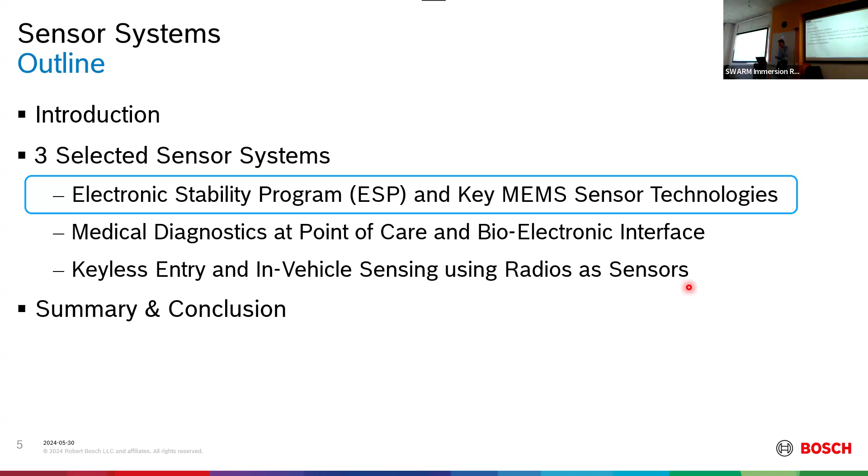Start is a bit slow. We tested audio. Should come in a second.

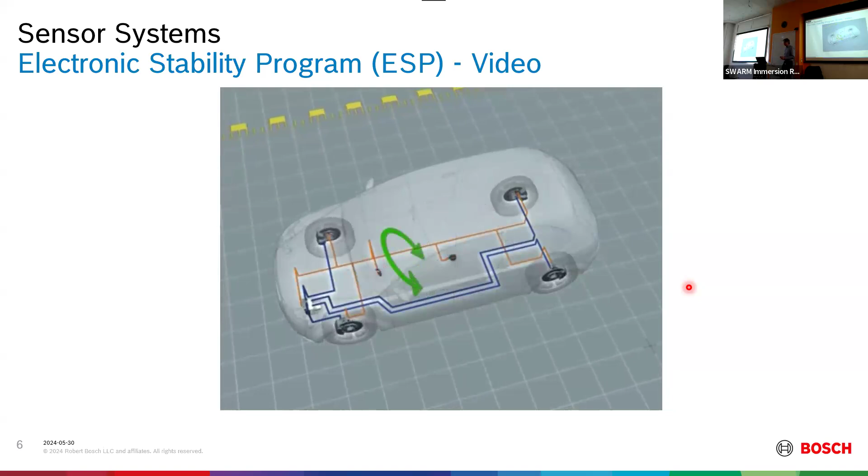In everyday driving, it's normal for transverse forces to arise. But when you drive a bit too fast or turn the steering wheel, these forces can negatively affect road holding. But the Electronic Stability Program ESP nips that in the bud by controlling the brakes, if necessary the engine, and if need be the transmission as well. ESP comprises the following components: a speed sensor on each wheel. The rotation rate sensor measures the car's rotation around its vertical axis. The steering angle sensor registers the driver's steering intention. From the sensor signals, the control unit computes when and how it has to intervene. The hydraulic unit builds up and reduces the braking pressure in the brakes.

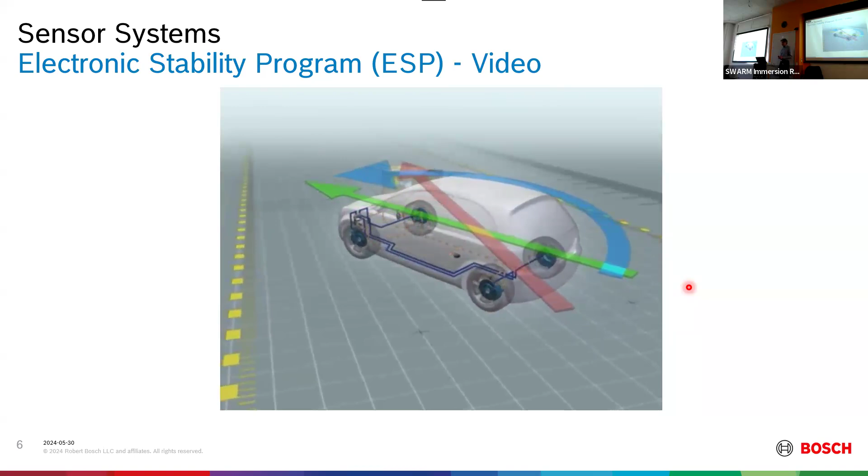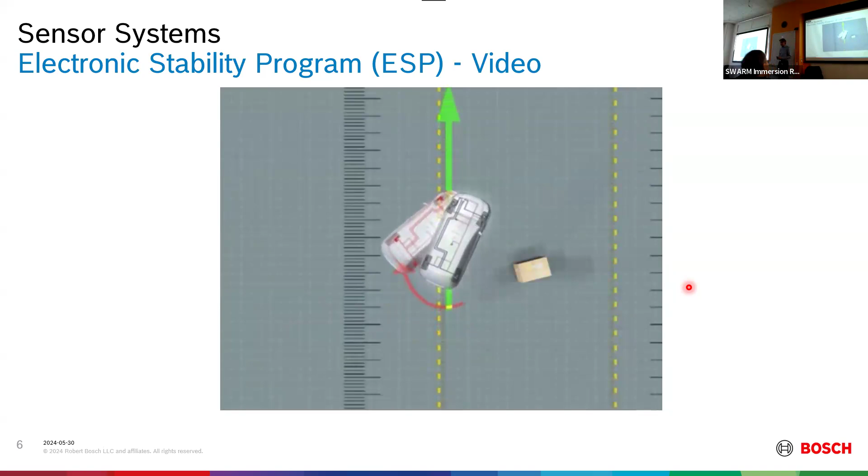What happens during the first steering maneuver? The driver has to swerve quickly to the left. The steering angle sensor transmits this to the ESP control unit. But the rotation rate sensor signals that the car is understeering. That is, it's drifting straight ahead towards the obstacle. In split seconds, ESP brakes the left rear wheel, very briefly and sharply. This produces the desired counteracting force so that the car responds as the driver intended. What happens when you react? When you pull the wheel over to keep the car in the left lane after avoiding the obstacle, the car tends to oversteer, and the rear end tends to break away to the left. The torque to the right is higher than the driver wants. In this case, ESP brakes the left front wheel. The torque is reduced. Instead of going into a skid, the car stays on course, thanks to ESP.

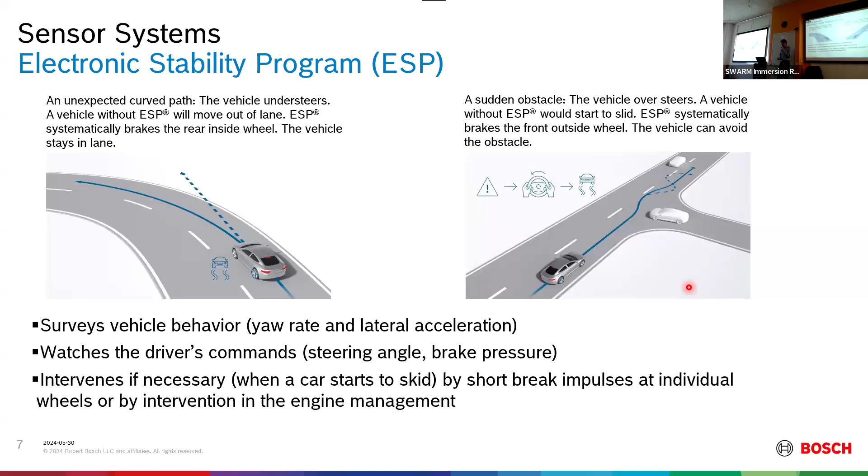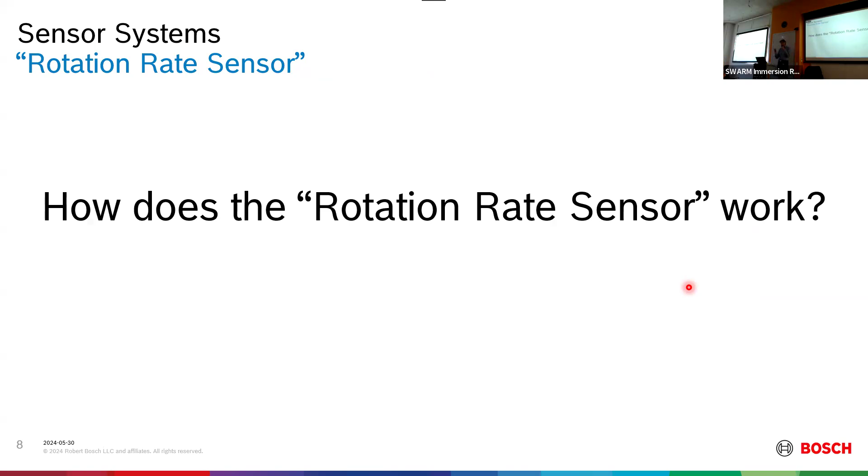So in this video, there was talk about rotation rate sensor. That's a gyroscope or yaw rate sensor. That's the so-called master sensor of the system. So there are different sensors, wheel speed, steering angle, but the sensor that actually finally decides what the system is supposed to think is the yaw rate sensor. So that's the most important one. And I'll show you one example of a sensor, how that looks like, and then go into more detail.

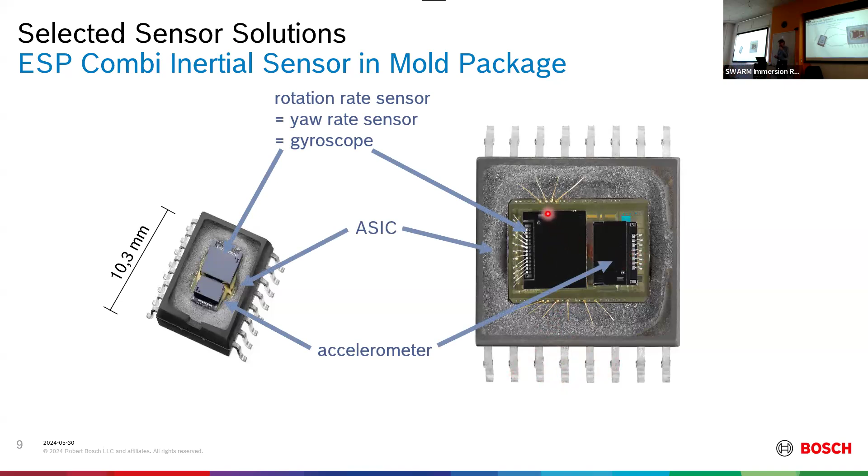So here you see how they are packaged. If you focus on the picture on the right, you see that there's a molded package with lead frame. And then inside of the package, we have the yaw rate sensor, the gyroscope. That's a purely mechanical part made out of silicon. And then we have an accelerometer right next to it, also purely mechanical. And below we have the ASIC. So they are glued on top of the ASIC and then bonded down to the ASIC. And from the ASIC, bond wires are connected to the lead frame.

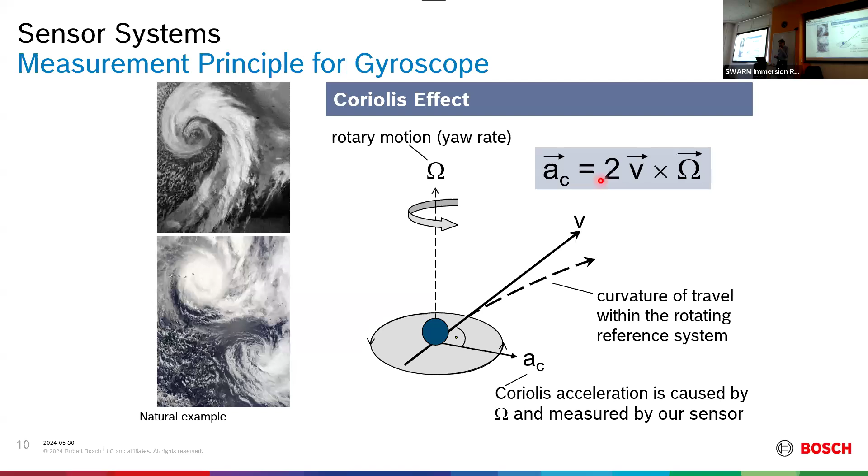So now, if you look at the gyro, it makes use of the Coriolis effect. If we have a mass that's moving at a known velocity v and experiences a yaw rate omega, then it will also experience an acceleration, Coriolis acceleration, which basically deflects the mass to the side. And now if we know the velocity or control it, and measure the acceleration or acceleration force, then we can calculate omega.

And the way we do it is like this. So we do surface micro-machined gyroscopes. It's based on a silicon substrate. Then we do an epi-poly with a thickness of maybe 11 micrometers in this case, goes up to 20 micrometers. And we do wafer level packaging. So we take another wafer that we bond on top of the surface micro-machined wafer. The wafer that we put on top has a cavity etched into it, and then we can encapsulate vacuum in the order of about 3 millibar.

And with this, we get quite a few system aspects. We can generate resonant frequencies in the order of 15 kilohertz, goes up to 30 kilohertz, which makes it pretty robust. We typically employ two masses that we operate in anti-parallel motion, which makes it more robust as well. We have high Q factors in the order of 5,000 in this case that lead to bias stability and good noise performance.

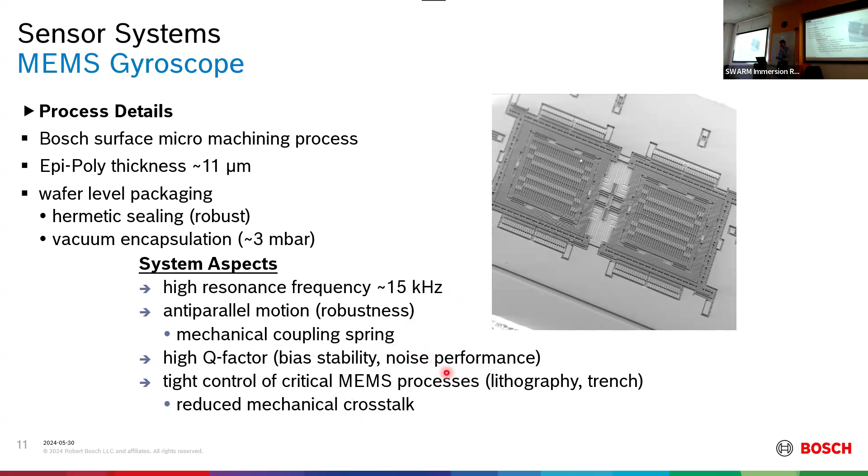And we have a tight control of the critical MEMS process steps. So if we look into more detail how this structure actually works, if we focus on the right side, one mass consists of 3 frames, and they are now illustrated in different colors.

So the red frame here, that's the so-called drive frame. And by applying electrostatic forces between the finger structure of this drive frame and fingers that are stationary on top of the silicon chip, we can actually pull this drive frame down in this picture, like towards the bottom of the slide. And if we apply the voltage on the top, we can pull it up. So we can pull it back and forth by applying electrostatic forces.

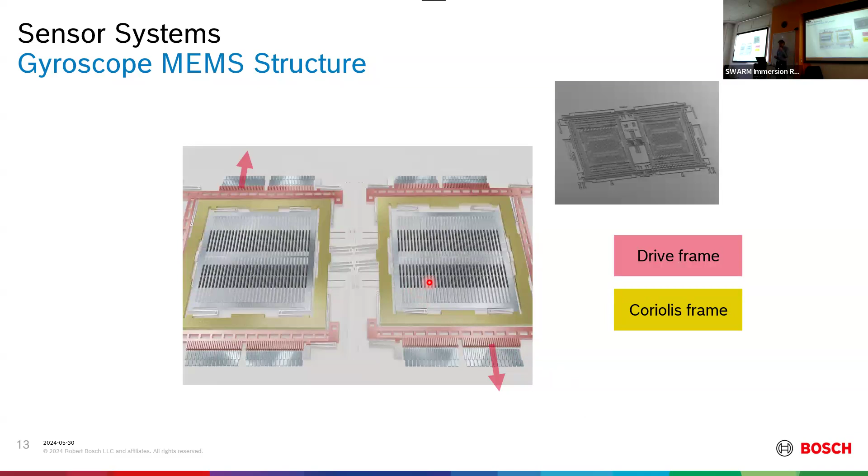And now in the center, here, there's this yellowish frame. That's the Coriolis frame that moves with the drive frame. It's mechanically coupled and moves with the drive frame up and down. And this will experience now the Coriolis force, which will make it also go sideways if there's yaw rate.

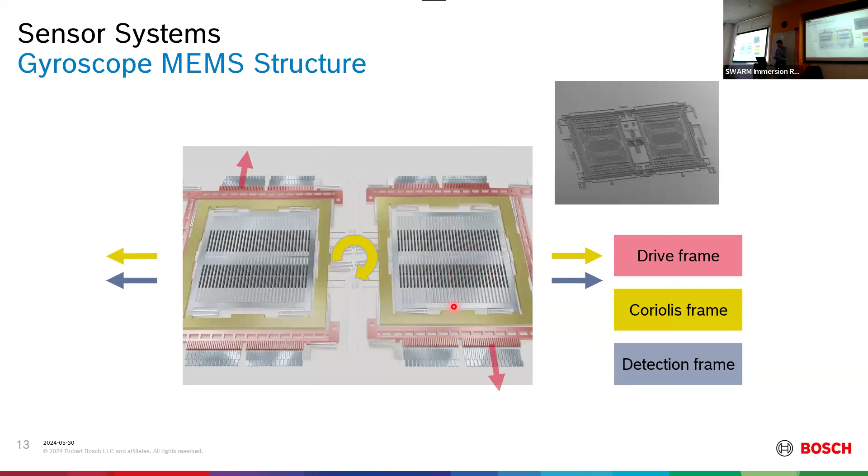And so this yellow frame then is mechanically coupled to the frame, which is gray here in the center. And that's the so-called detection frame, which then moves left and right. And then we can use, again, interdigitized structures here in the center to read out the movement as a capacitive change.

And so the electronics that's wrapped around this looks like this. We have our red drive frame here that needs to be driven back and forth at a resonant frequency of the structure, about 15 kilohertz. And in order to do this, we sample the deflection by having a C to V converter that converts capacitive change into voltage. And then we convert it into the digital domain with an A to D converter. We have an automatic gain control, AGC, that has a target amplitude for this structure. And then we couple back via a D to A converter and apply our electrostatic forces via voltages and drive this red frame up and down.

And on the detection side, we again use a C to V converter that measures the deflection of this gray central frame, converted to voltage, converted to digital domain, then we have digital filtering. And in our case, we actually do force feedback. So we couple the loop and feedback voltages to keep this frame still, and we only measure the force that we need to apply to keep it still.

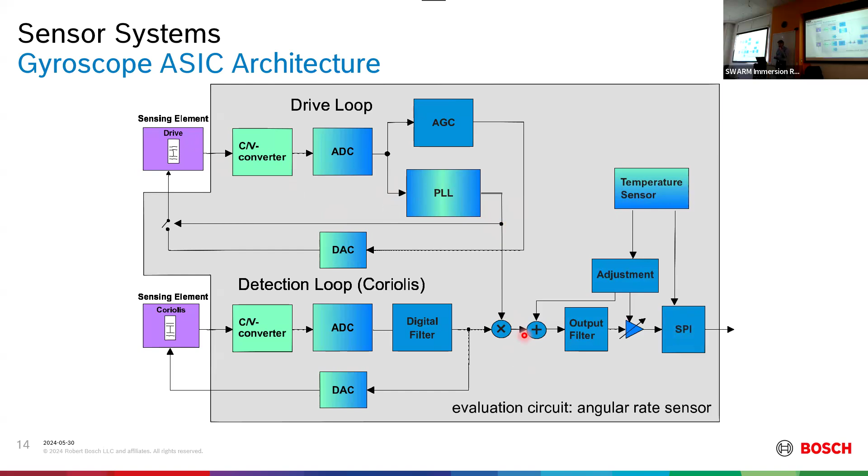And we run a PLL of the drive resonant frequency. So we don't need any external clock. Everything is clocked from the MEMS element and in sync with it. And then we can relatively easily demodulate and then look for the output signal, filter it, correct it for temperature changes, and then apply it on a digital bus. So that's the way the system is set up.

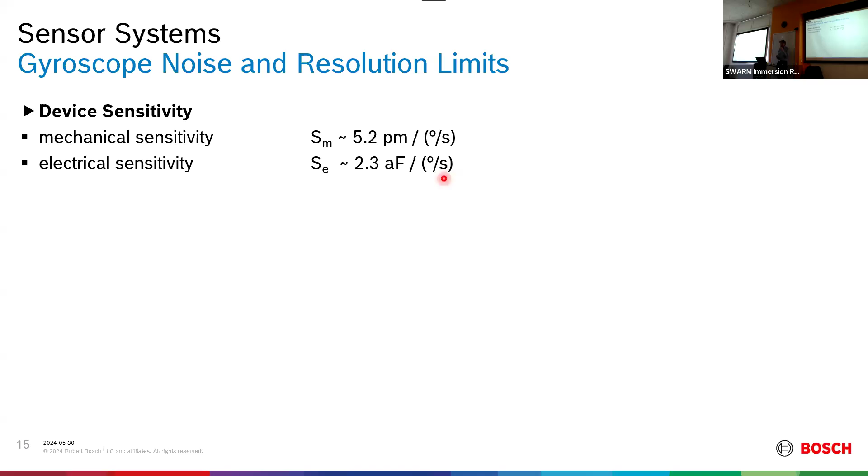I'll show you a few performance characteristics. Electrical sensitivity of such structures is about 2.3 attofarad per degree per second, which is pretty precise and leads to a pretty low resolution limit. Just for the fun of it, we thought, could we measure the rotation of the Earth with such a sensor? And the answer is yes.

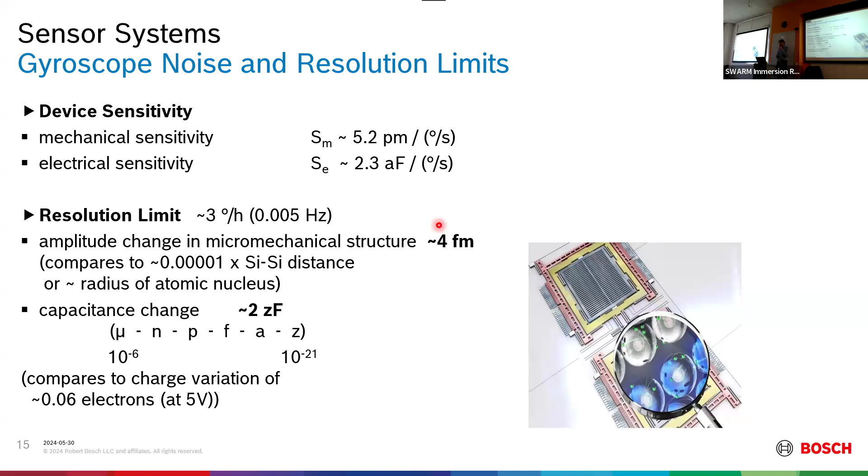So if you put a low-pass filter behind with about 5 millihertz, you can actually measure about 3 degrees per hour, and that's enough to sense the rotation of the Earth. And that actually is equivalent to capacitive changes in the order of 2 zeptofarad. So very precise, and has to work over temperature for automotive range between minus 40 degrees C and about 140 degrees C.

One can ask how many such MEMS sensors are in a modern vehicle. The answer is it's about 50 sensors that we have in modern vehicles. Different categories. There's passive safety, for example, acceleration sensors for airbag systems. There's active safety, there's ESP that we just talked about. Powertrain, for example, mass flow sensors. They measure how much gas is flowing into the engine for engine control. And there are comfort functions, for example, again, inertial sensors for navigation.

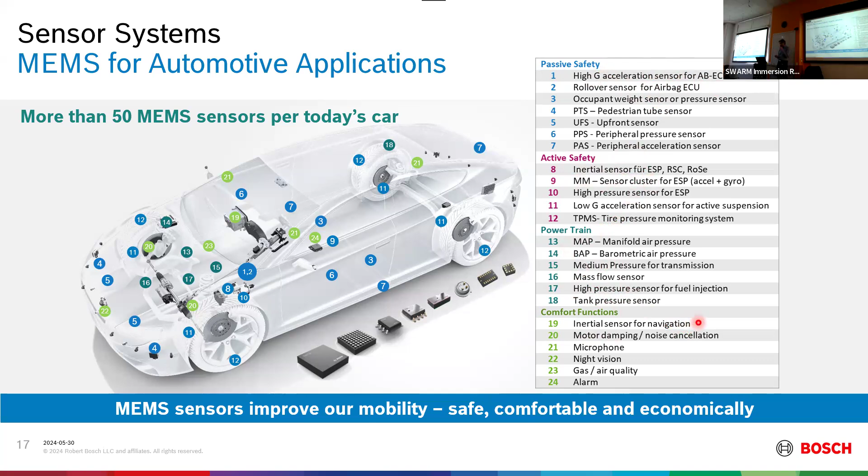There's also consumer sensors, as we all know, smartphones, hearables. There are accelerometers in earbuds, all the way to gaming. There's one area which is, in our opinion, also a good application field for such micromechanical sensors that I haven't talked about, and that's the medical field. So I would like to motivate why it makes sense to have medical diagnostics at point of care, and then also go all the way down to the interface.

So point of care, the pandemic has shown us it's important to do tests right where the patients are. If somebody wants to know if a person has COVID, for example, it's good to have a COVID test right there, and ideally one that's very precise, like a DNA-based test, and not have to send samples to a hospital or like a central lab and wait for 2 days or so to get the results back.

And at Bosch, we introduced a platform into the market for point-of-care medical diagnostics. So point-of-care means hospitals, doctors' offices, schools, could also mean people's homes, actually. And this platform is an open platform. So it's a system where partner companies can actually bring their tests and run it on the Bosch platform in a fully automated way. And it consists of 2 main parts.

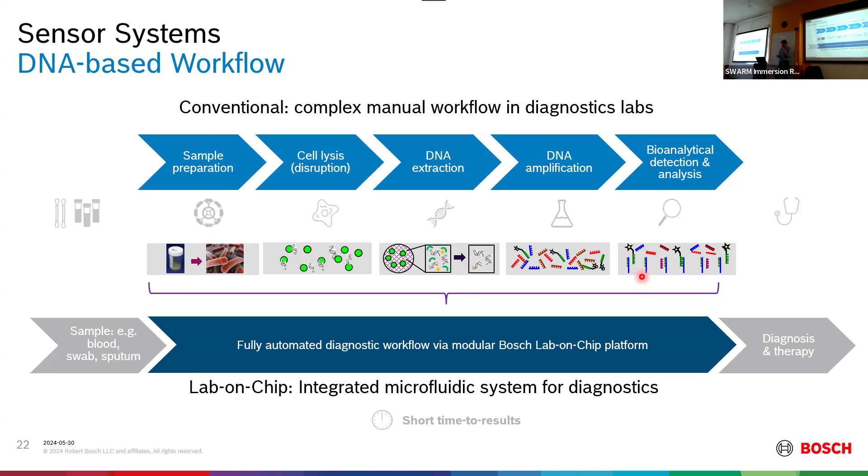So if you look at the range of applications, what I just talked about is the very first kind of application. It's rapid diagnostics, 30 minutes, maybe 1 hour at point of care, using DNA half strands. They're called oligonucleotides. And we typically use about 6 oligonucleotides to determine 1 bacteria, for example. There's another range of applications, which is immunodiagnostics. So that's looking for proteins, not for DNA. And we as Bosch don't have a product in the market yet, but we are doing research in this field. And here it's about detecting proteins. For example, troponin is a marker for heart attack. And that's also very important to know at point of care.

Then we could drive the very first kind of application a bit further and multiplex it, like having several tests run on one cartridge and having many oligonucleotides spread over a sensor area. For example, way more than 100 different kinds. And that would then enable tests like sepsis, for example. And then there's the last application area, which is oncology. Imagine taking a biopsy of a person and then analyzing the tumor cells for its tumor DNA and detecting what kind of tumor it is and if the tumor has mutated.

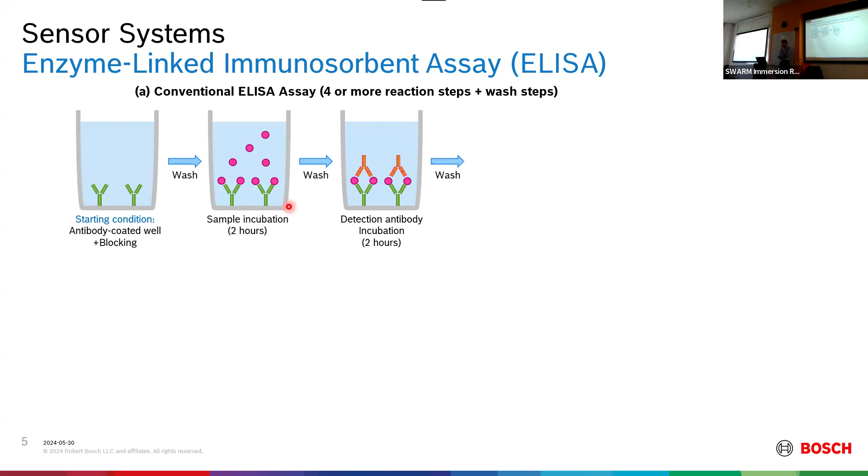Then a detection antibody is added, incubated for about 2 hours. Unbound detection antibodies are washed away. Then an enzyme is added. And then afterwards, a substrate is added for developing this for another 20 minutes. And then if everything works out, and the sample was in the solution, then you have this sandwich here formed, and you can actually see a color change in one of your containers here. So now we believe this can be made much easier.

And we did some research on this. So what we do is, instead of using such a 96 well plate, we use a different substrate that is electrically conductive. And it could be a CMOS chip. We chose to go with a glass slide. So that's a typical glass slide here that you would see if somebody does experiments under a microscope. If you look at it a bit more carefully, you will actually see that we patterned the glass slide. So there's a layer of ITO, indium tin oxide, on top of the glass slide, which is transparent, but also electrically conductive. And I'll show you what we do with this.

So the first step is similar to the standard. We spot capture antibodies with a spotter. Spot size is about 100 micrometers. So we can spot many, like thousands of spots on such a glass slide. And after we have spotted the antibodies, we wash the unbound antibodies away. So we need to do one washing step. And then we add everything else. So we add the sample, detection antibodies that are marked with fluorophores, and let it incubate. And now we don't need to do anything else.

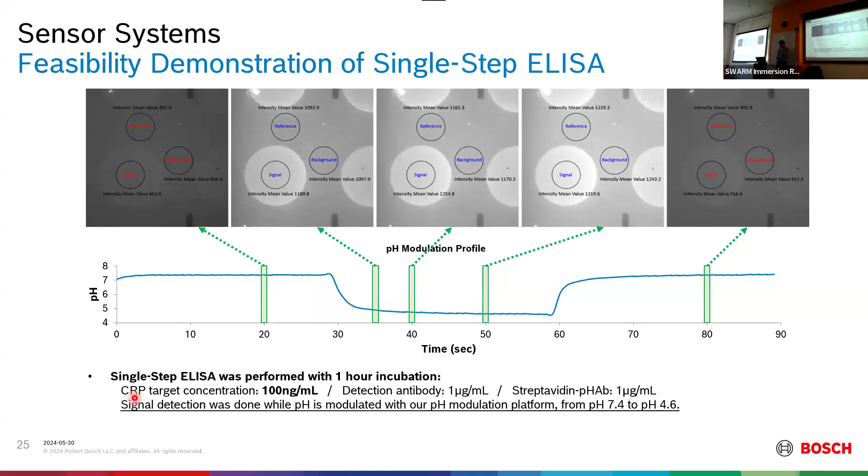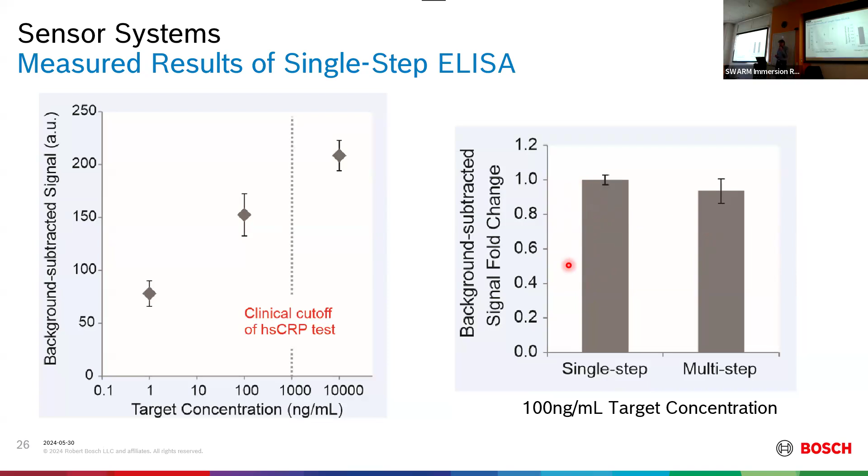To show this in more detail, here on the x-axis you see the concentration, and on the y-axis you see the background subtracted signal, and you see at 100 nanogram per milliliter, there's a distinguished signal. Even for 1 nanogram per milliliter we can still see a signal, and the cutoff in clinical settings is about 1,000 nanogram per milliliter. We compared it to a standard ELISA and see that we pretty much have the same sensitivity. We are slightly more sensitive, but it's pretty much the same. So with this, we believe that you can actually make an automated test that runs in much less time without any human interaction and do protein-based sensing.

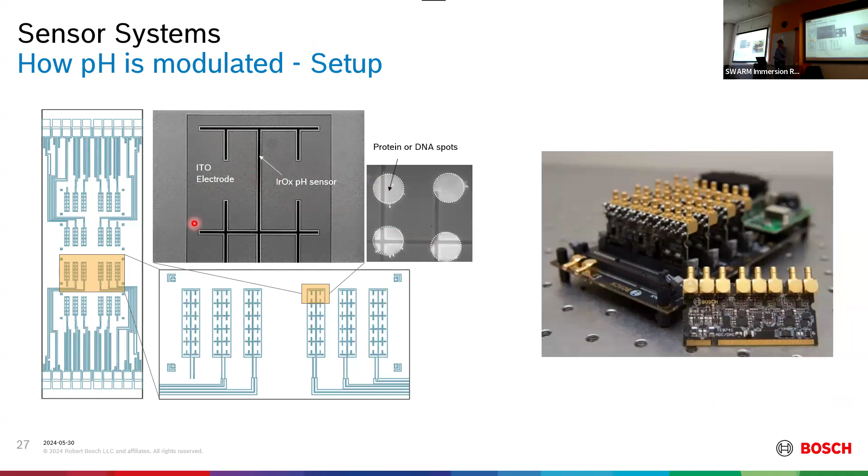Now the question is, how do we modulate pH so close to the surface? And that's what this slide is for, that's currently going around in the room. So that's a slide which is made out of glass, coated with ITO, as I mentioned, also coated with iridium oxide. Here you see a picture. So most of the surface is ITO, and then there's iridium oxide as well. And here you see the spots again, and some electronics that we built in order to control this for prototyping. Here you see how it actually works. So if you look at the glass slide from the side, you see working electrodes in light blue.

They are short-circuited, all connected together. And you see the iridium oxide electrode right between them. And now, on top of this is aqueous solution with all the ingredients that I just mentioned, plus one, which is a quinone. So this quinone here has hydrogen atoms that can be set free and become hydrogen protons, and also electrons can be set free.

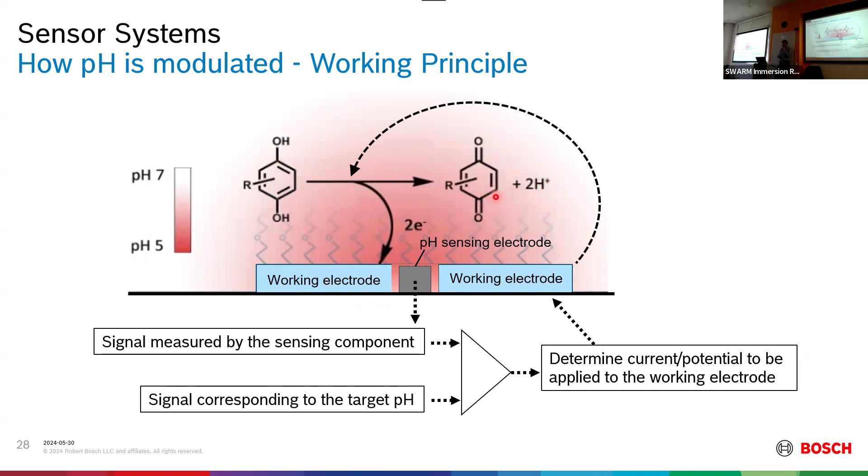So if this is oxidized, 2 electrons will flow to the working electrode, and hydrogen protons will be set free, which changes the pH. pH goes down. So now by sensing the pH with our iridium oxide sensor, and then applying currents via those working electrodes into the solution, we can actually change the pH via software at the end, electronically, in a closed loop manner.

And we believe we can actually do more with this pH modulation. But that's also a question to you. What else could we do with such a modulation technique close to the surface? It might be also a potential for collaboration between us and you if we find a good application to apply this to.

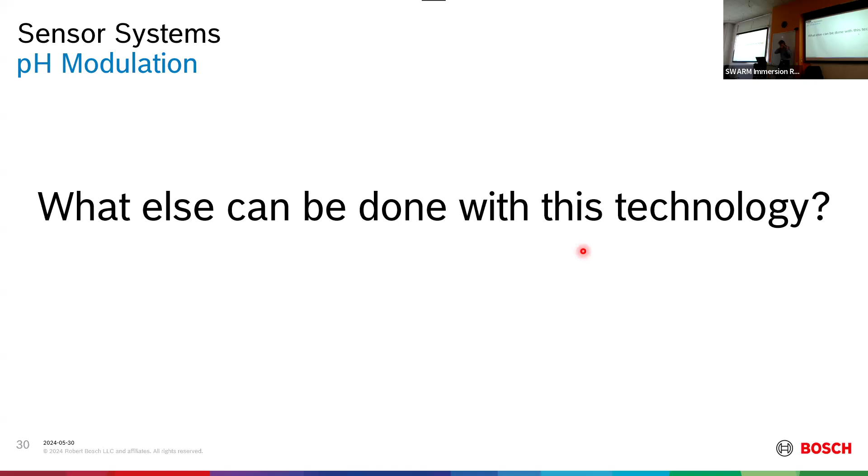With this, I would like to go to the next application area, which is keyless entry and in-vehicle sensing using radios as sensors. So again, I would like to show a brief video, 1.5 minutes or so, to explain the application, and then I would go into the details.

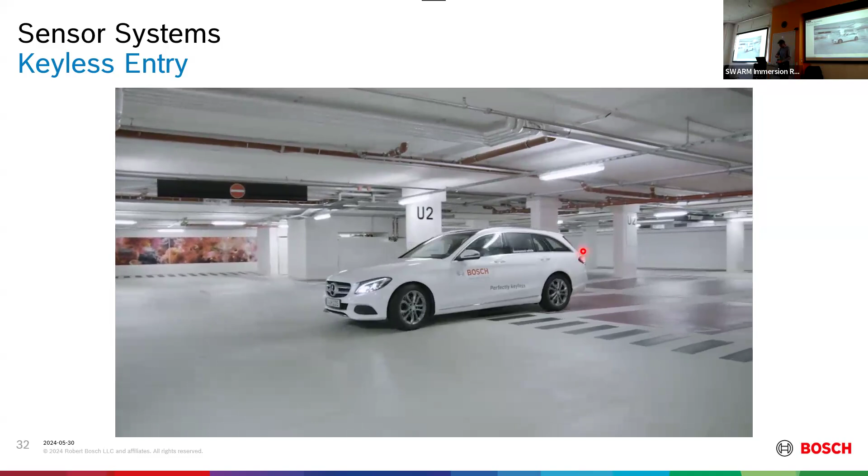With the secure system Perfectly Keyless by Bosch, your smartphone becomes the key. In Perfectly Keyless, vehicle and smartphone perform the locking and unlocking of the vehicle reliably and precisely. When the driver gets out, the vehicle independently searches for the key. If the smartphone is removed from the vehicle in the locking zone, the vehicle is locked automatically. A message on the smartphone screen notifies the driver.

Perfectly Keyless offers more comfort and flexibility to the driver. The vehicle owner can grant other users access to the vehicle using an app. An additional key is then sent over the cloud. Each user receives their own personal key. Thus, the driver can easily allow others to use the vehicle wherever they are.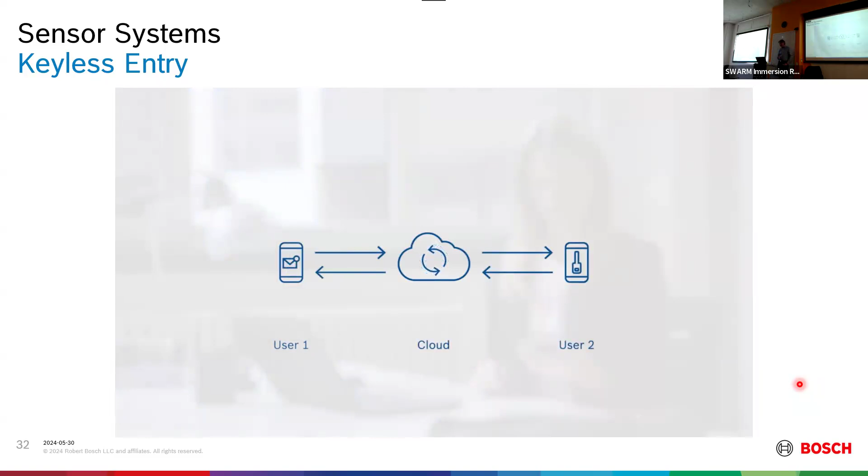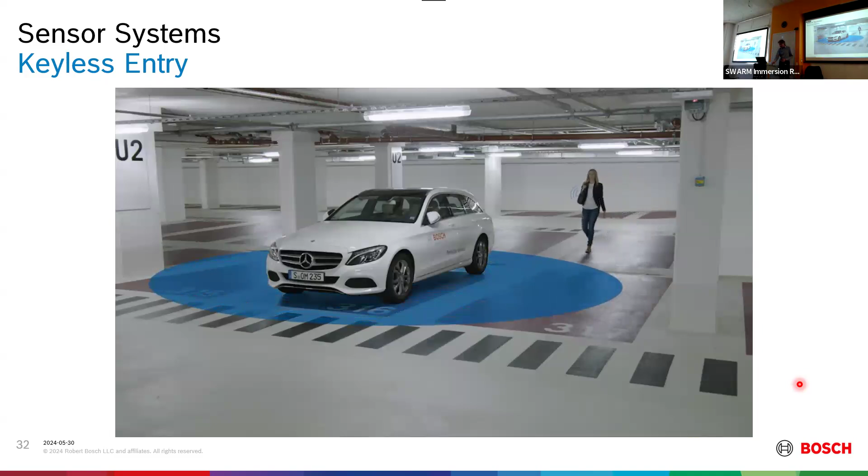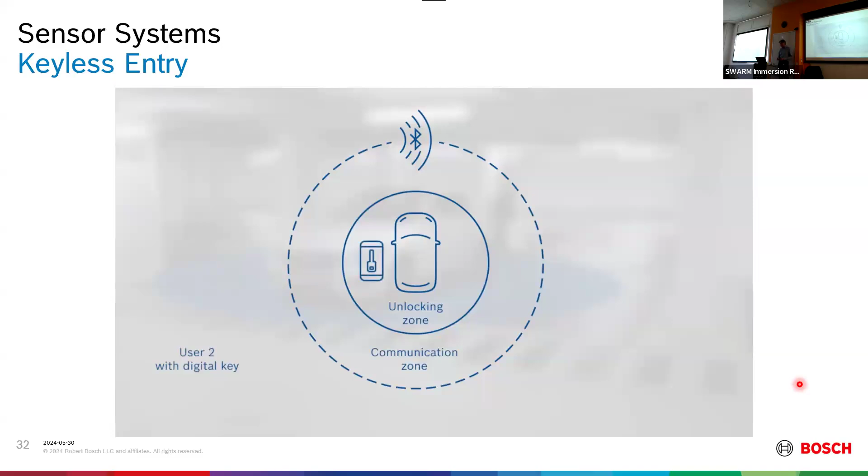The system's automatic opening function is also very precise. The smartphone only links up with the system when it is within the communication range of the vehicle. As the smartphone approaches the vehicle and enters the unlocking zone, the vehicle is unlocked automatically. As soon as the vehicle is automatically unlocked, customized settings such as the mirror and seat positions are also triggered.

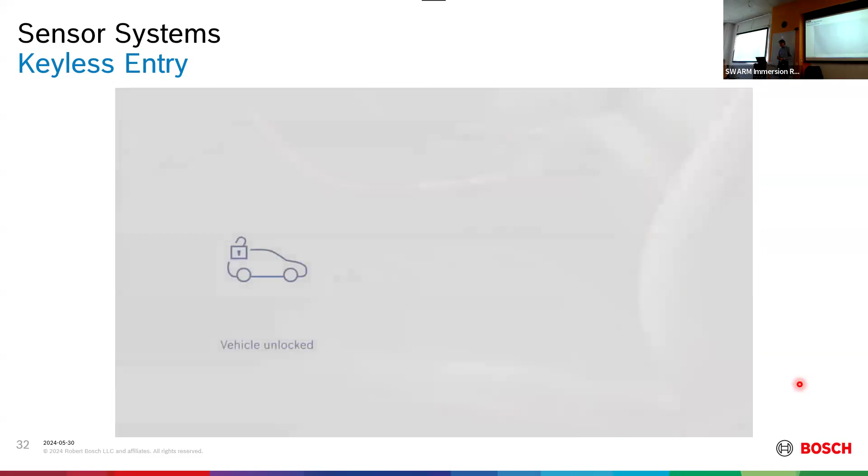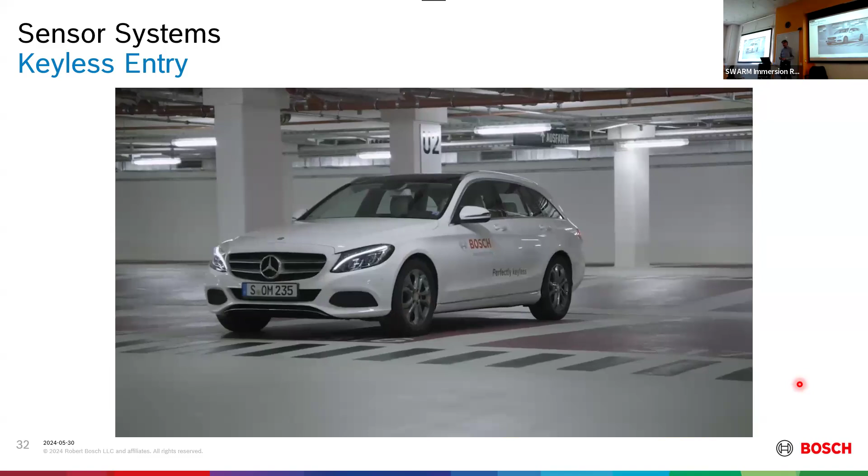The passive start is another function to make your life easier. When the start-stop button is pressed, a search for the digital key is initiated inside the vehicle. If the search is successful, the engine will start. Perfectly Keyless by Bosch. Comfortable, precise, and secure.

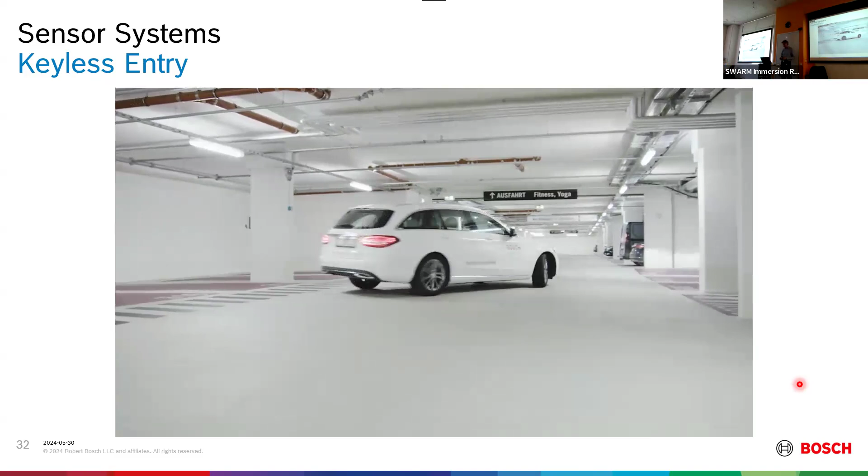So for many aspects of this application, we needed to know where the cell phone is relative to the car. Like in the first case, if a person approaches the vehicle and it's about to unlock, the system needs to realize that the phone is getting closer and closer to the car. And then for starting the engine, the phone needs to be inside of the car. And for locking the vehicle, the system needs to understand that the person is walking away. So localizing the phone is actually an enabler for this application.

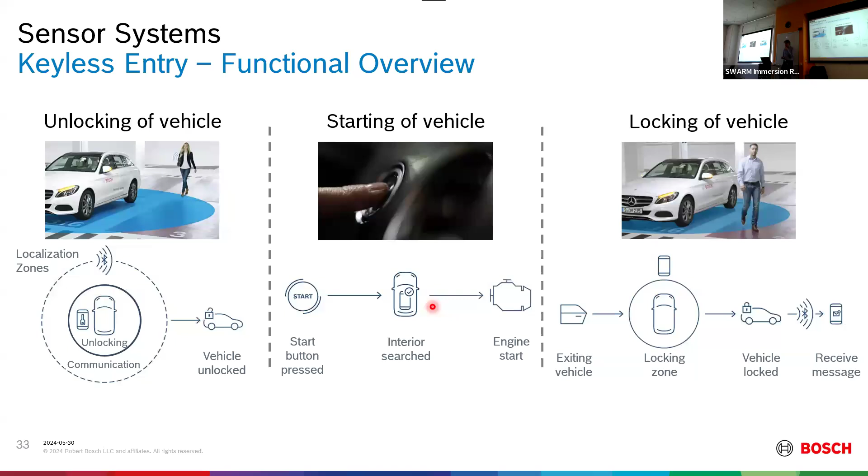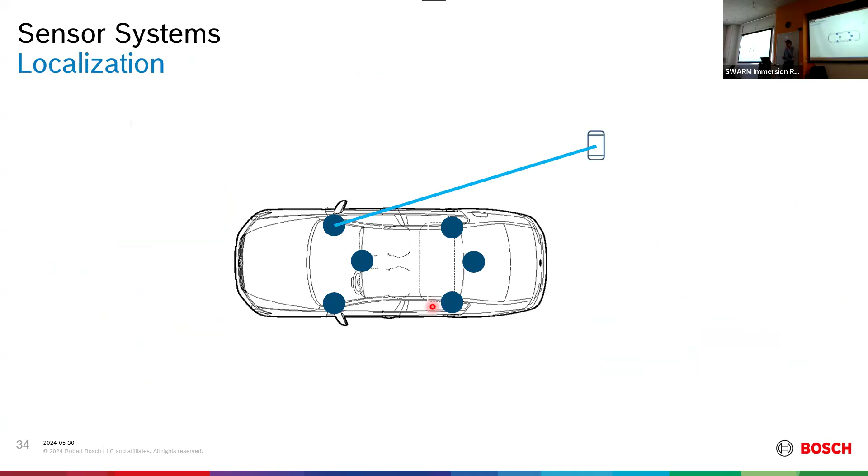And the question is, how do we do it? We equip the car with about 6 radios. And those radios can talk Bluetooth Low Energy, but they can also talk ultra wideband. And now, as a first step, one of the radios will communicate with the cell phone via ultra wideband, send messages back and forth, and measure time of flight. And then the other radios do the same thing, and we can do triangulation.

We can estimate the position of the phone pretty well based on the radio signals of those 6 radios and localize the phone. So that's the enabler for this application. The question is, can we do more with such a system? Can we enable extra functions that go beyond just access to the vehicle? And that's what we are currently working on in research.

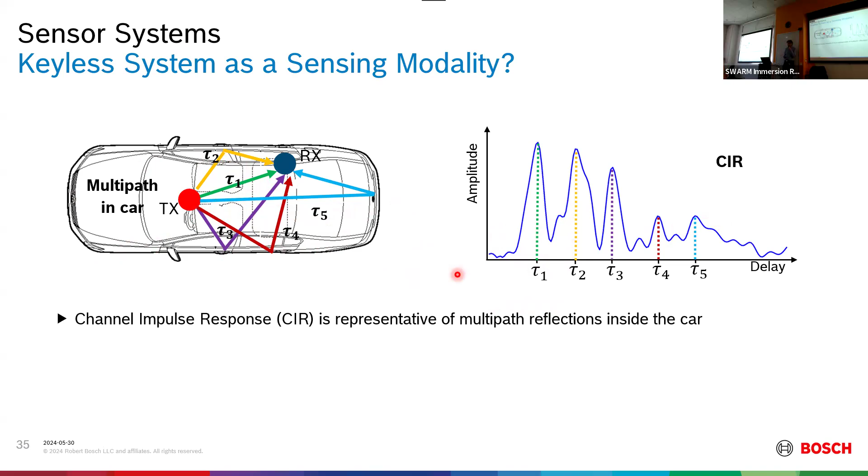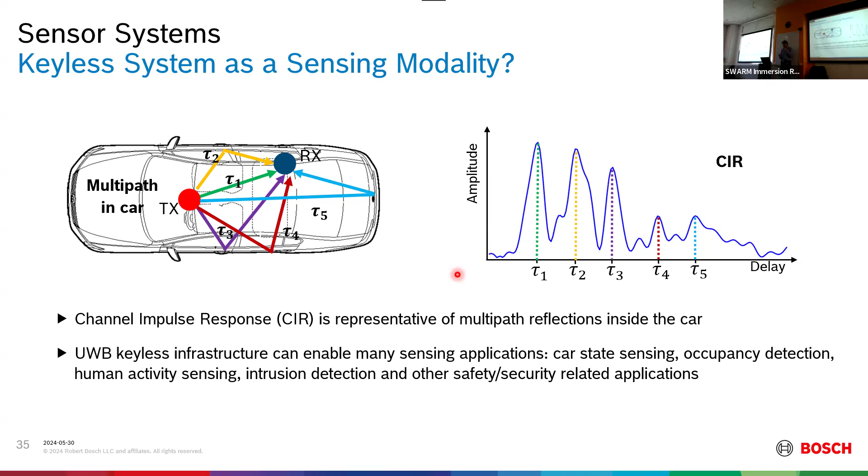And intuitively, you would now imagine that if something happens inside of the vehicle, that should change the impulse responses between those two radios. And we believe that we could use this in order to enable other use cases. For example, occupancy detection, somebody inside of the car that's not supposed to be in there, like intrusion detection, all the way to detecting children that are left behind. Left behind detection is a big thing, actually, in Europe. There's a lot of pull for it. And such a technology might at least augment other systems or maybe replace them in detecting children that are left behind. And the question is, how would we do this?

I'll step by step try to get there. First, this slide here, showing intuitively that this might be feasible. So for 5 different states of a car, we looked at the raw CIRs, and the 5 different states are static, like there's nothing happening around the car, nobody inside. Then person outside of the car, pretty close by, 5 centimeters away. Person outside about 100 centimeters away. Front door open and person inside. So those were the 5 states. And for each of those states, we recorded the CIR. And on the left side, you see intuitively there's a change if we plot them one after the other.

On the center graph, we did a bit more elaborate signal processing. We recorded first the CIR for the static state as an average. That's our baseline, basically. And then for each situation, we plotted the root mean square error between the current state and the recorded static state. And so you see here for those different states, the different results. And we can already guess that there's some opportunity for differentiation, but some of them are still pretty close by.

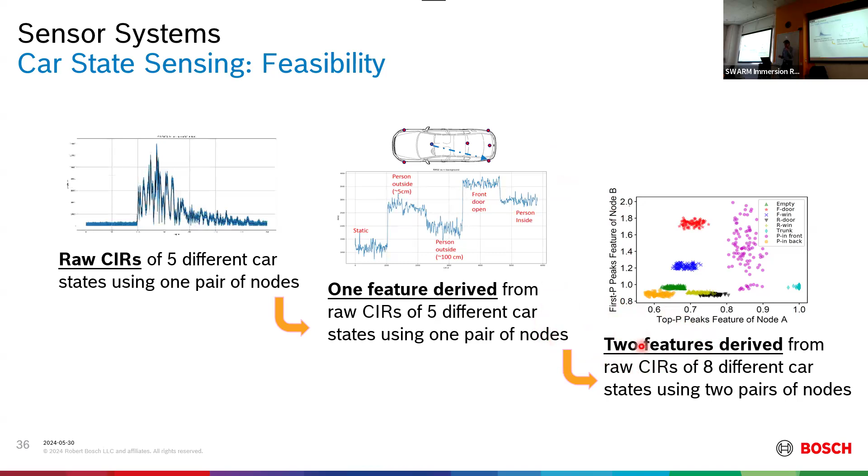And then we went to the next step and we said, okay, let's put features on axes. Like in this example here, we put on the x-axis the power of the top peak in the CIR. And on the y-axis, we put the power of the first peak. And then, if I zoom in a bit more, you see that there are clusters of points. Like for some states, for example, this blue one here, which is front window open, it's pretty isolated. Or the red one is front door open, it's isolated. And some others are pretty close by. And there's one that's all over the place, which is person in front. But intuitively, you get a sense that you might actually be able to understand what's happening in there.

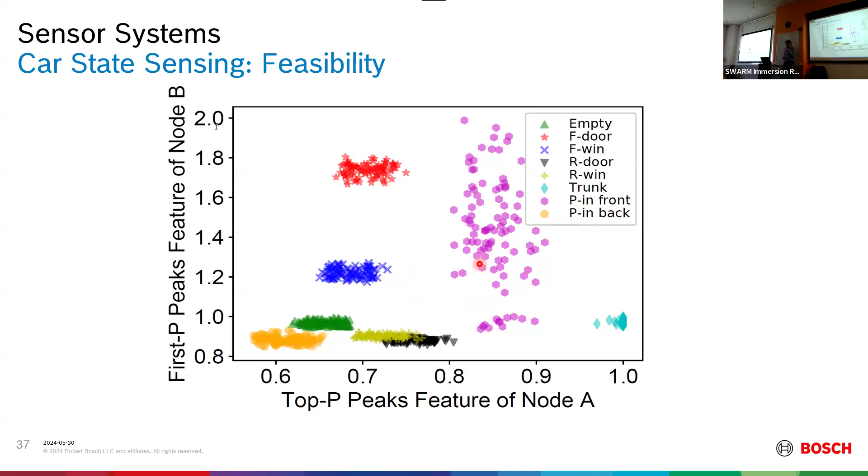Standard machine learning, no neural networks, and then eventually estimated the car state. And here I'll show you what we tested this in. We put the car into 7 locations, for example, and here on the right side, you see the pictures that correspond to it. Like we put it into our garage, we put it outside on the parking lot with other cars around it, we put it outside just by itself.

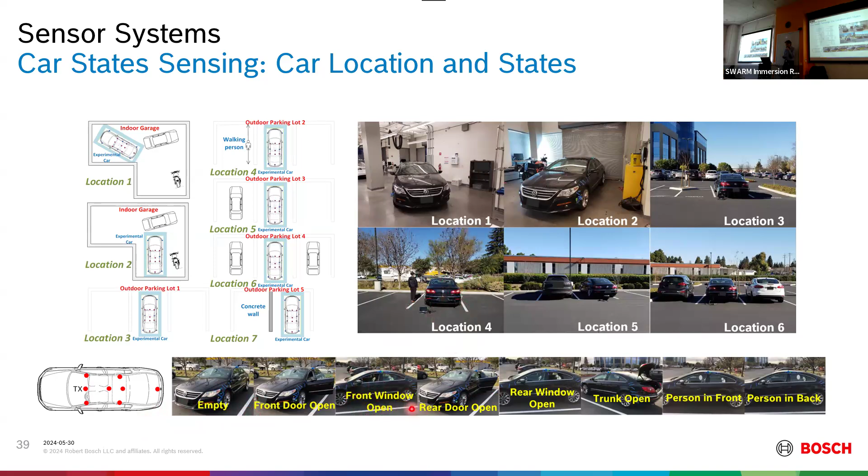And in each location, we tested 8 different states. One is empty car, front door open, front window open, all the way to person in the front, person in the back. And if you look at the confusion matrix for this, averaged over all 7 locations, you see that this is actually pretty good. Here you see the true states, here you see the predicted states. And if we look at the average over all 7 locations, it's about 98%.

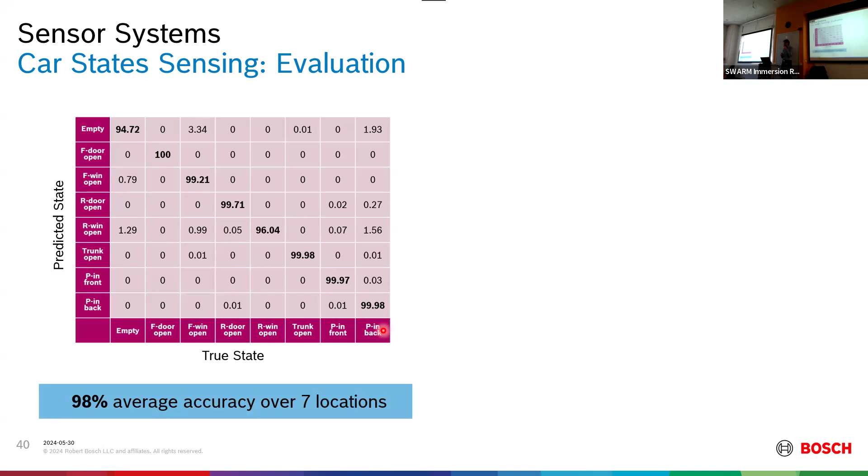But that's with always 1 transmitter node and 7 receivers. So we use 8 nodes total. The question is, can we reduce the number of nodes? So on the right side here, you see a graph where, see if I can find this here. That's difficult. It's hidden in my Zoom window here.

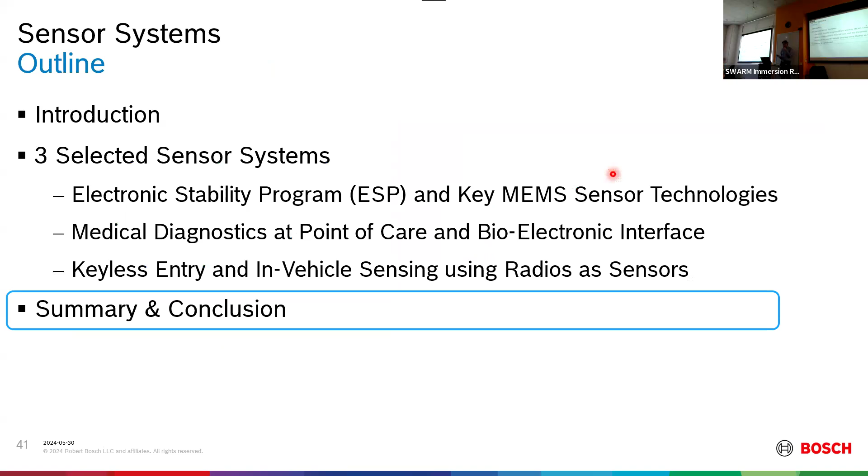With this, I would like to summarize and conclude. So I hope I could show you 3 sensor systems and the key technologies behind them. Started with electronic stability program, including MEMS inertial sensors, then medical diagnostics, including what we call single-step ELISA, using pH modulation, and then went to keyless entry using radios as sensors to do in-vehicle sensing. And what I try to bring across is that interdisciplinary research is key. I feel there are many disciplines that need to come together in order to pull such sensor systems off.

And one advice to the students is take the opportunities to also learn outside of your core areas. It's clear that you need to be strong in your core areas, but if you have a chance to look left and right a bit and at least learn the language of adjacent disciplines, I feel that can help in your professional life at the company or maybe in academia going forward. And I also wanted to show the complexity of such systems. And again, there are collaboration opportunities in several areas here.

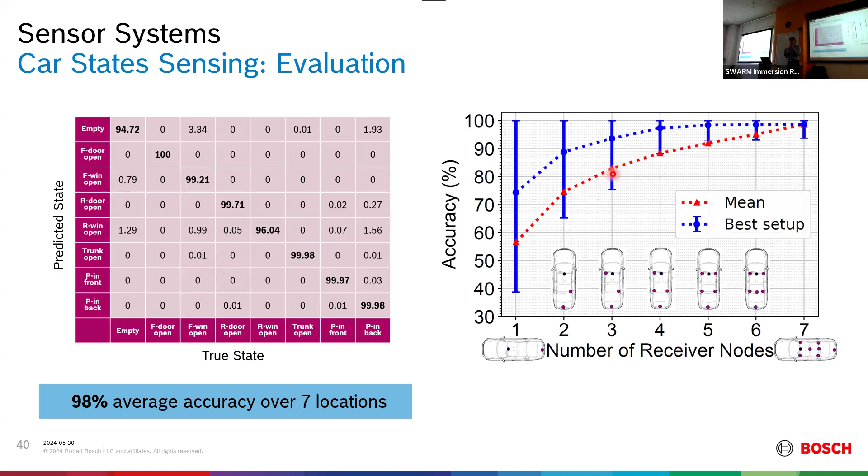Yes. So that's possible, and those are the different permutations. Nevertheless, it turned out that using the node in the center here, node 0, as a transmitter is a good way to start. Because intuitively, it's right in the center, and you can pretty much cover the interior well. But we did the full permutation, so you can imagine all combinations. Okay, one last question.

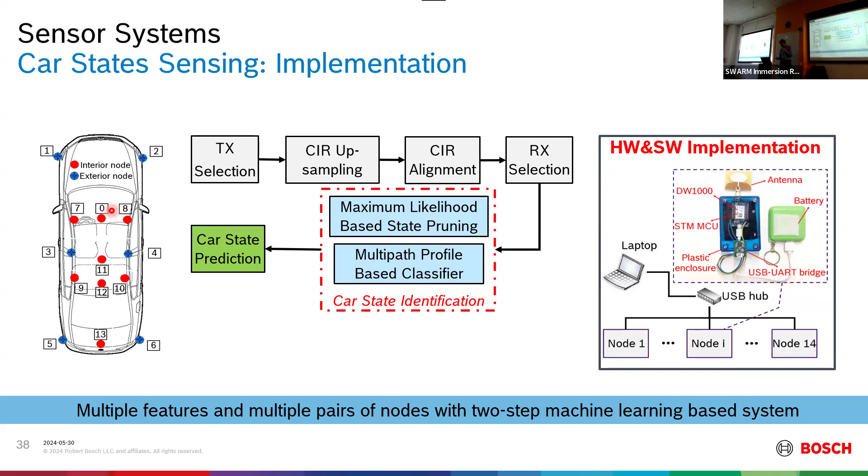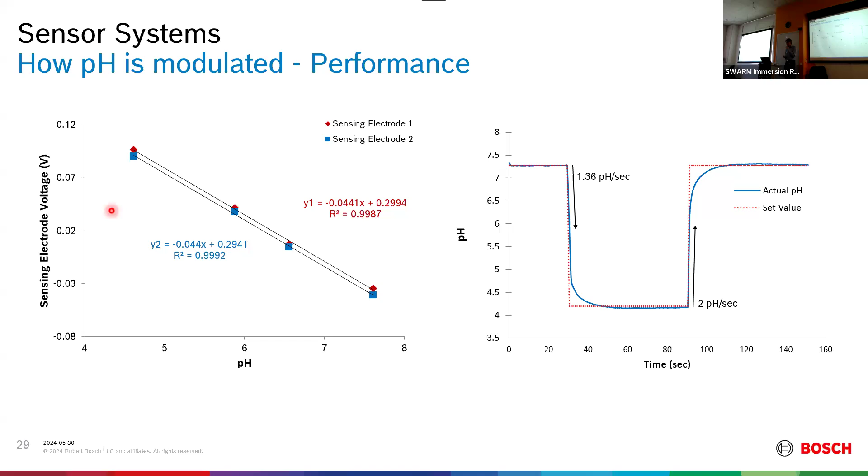For the biosensor, you're obviously using optical sensing. Can you elaborate on why optical versus, say, electrochemical or magnetic? And it also seems like this pH modulation was a solution to make the optical sensing work, modulating the fluorophore activity. So which came first? Did you choose optical for a spec reason and then devise this pH-sensitive fluorophore?

Yeah. So optical is, first of all, pretty close to what people are currently doing in the lab, but that's not an argument for doing it. In this case, the product that we have in the market is an optical sensor as well. We chose to not electrify the cartridge. There's no electronics in the cartridges that are currently in our products. That makes them easier to make and also less costly. And therefore, optical readout is good.

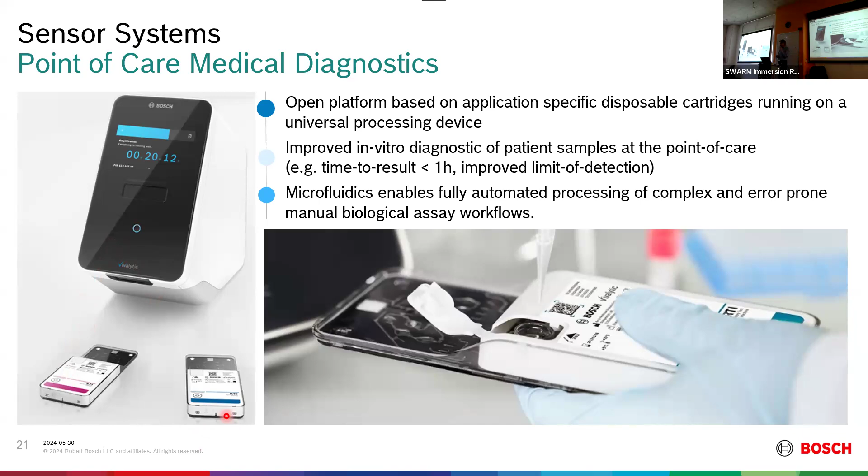We are thinking of electrifying the cartridges. That could also then lead to electrical readouts. We might actually save the whole optics in the reader, and it could be a solution. Yes. And let me show this, just as an intermediate step, which I didn't really talk about.

So we announced a product that is based on a MEMS chip, which is optical. This is a MEMS silicon chip. It's about the size of my fingernail, and it has about 256 wells. It's like a 96-well plate, just in MEMS. And then we can run several reactions in parallel in this chip, so it's useful for multiplexing.